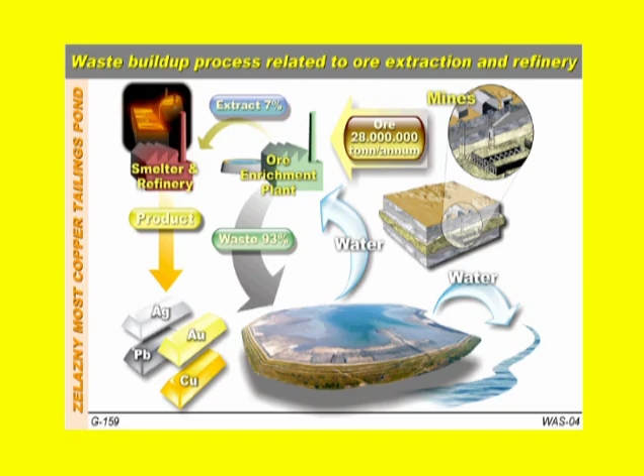But I am, unfortunately, not involved in that part of the problem - I am involved in the most dirty problem, which is the discharge of this waste into this huge tailing pond. In addition, the tailing pond discharges every year between 6 million and 20 million cubic meters of leachate from the pond into the Odra River, the second largest river in Poland. Because of environmental concern - but the plant cannot be stopped, as this is the largest industry in Poland in terms of yearly turnover - they pay tremendous fines to the government for discharging this leachate into the river.

This is the map of Poland. Poland is located here, and the tailing pond is in the southwest part of Poland, exactly at this point.

This is the plan view of the tailing pond. You have two main decant ponds and the secondary decant pond. This we will see later on.

The next work is, the client is this Polish cuprum industry, which is the government industry. The government holds the majority of the shares.

The International Board of Experts is made of Dr. David Carrier from the United States, Professor Richard Chandler from UK Imperial College, Professor Kaare Høeg from Oslo University and from the Norwegian Geotechnical Institute, and by myself.

We have as the interface, as the liaison officer with the client, the Polish geotechnical expert, Professor Wolski from Warsaw. When we were appointed by the client in '92, as I have mentioned, they asked us for an independent assessment of several issues.

The issues were: stability of the existing dam at crest elevation plus 150, feasibility of raising the dam crest to elevation 160 (we are now at 167), feasibility of further dam crest rising to plus 200, re-evaluation of construction procedure and monitoring system, and recommendation of additional soil investigation.

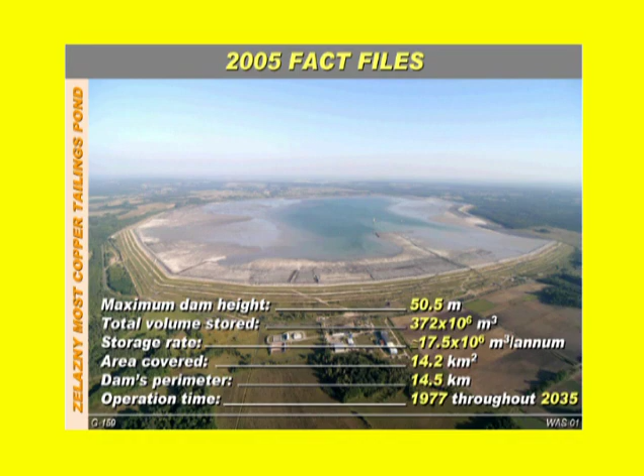The plant operation time is from 1977 to 2035.

It's clear that I shall probably not see, for sure, the final stage of this construction.

The tailing dam is constructed using the most dangerous method, the upstream method, as you can see here.

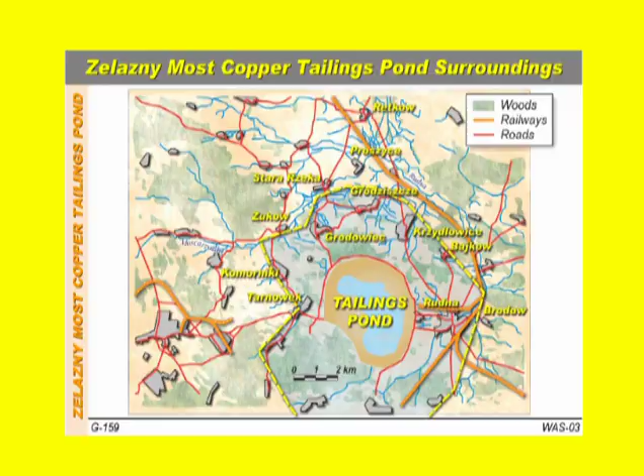Unfortunately for us, this tailing pond is surrounded by a number of small towns and villages, which obviously has created tremendous concern about public safety.

We can go on to the environmental impact caused during construction, which I shall not discuss in detail.

The impact on the tailing pond surroundings covers about 30 square kilometers, and the most important problems are contamination of surface and groundwater by infiltration of post-flotation leachate.

There is also dusting caused by wind on the beaches, the wind erosion, and this obviously requires continuous monitoring of groundwater, air, and terrain.

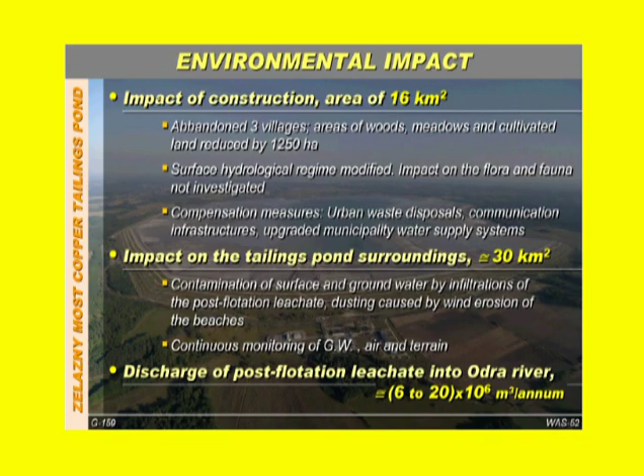As I mentioned, there is a discharge of post-flotation leachate into the Odra River, ranging from 6 to 20 million cubic meters per annum.

Next, geotechnical site characterization.

Site characterization, most recent investigation. The investigation focused on the foundation soil, assessment of index and mechanical properties, with special reference to Pliocene clay, which, as you will see, is critical for dam stability.

Localization, description, and quantification of periglacial and glaciotectonic phenomena in clays, which are fundamental.

This was done as the most recent investigation, ordered and planned by us after '92, around '95, '96. That is what we did as the most recent investigation.

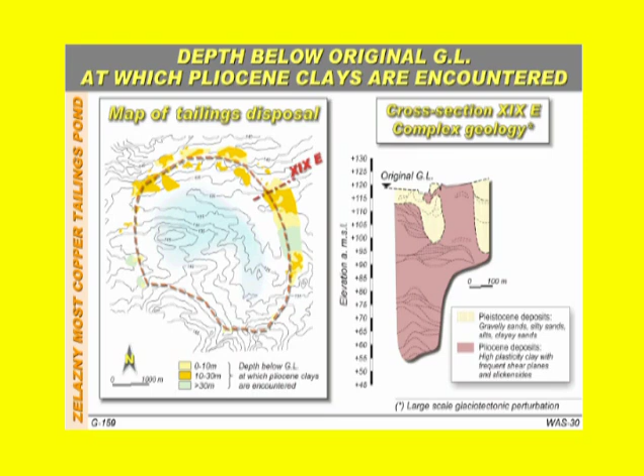Just to give you an idea, this is an example of a relatively simple soil profile here, which is one of the critical sections, 19 East. This is the Pliocene, this is the quaternary deposit.

Just to give you an idea, you will see something which is even much worse. Next, this is the critical cross section to which I shall refer, 16 East. This is the dam at the present elevation, 165 or 66.

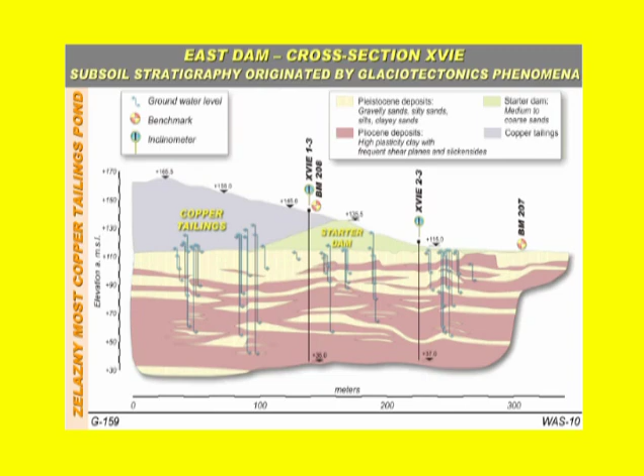This is the starter dam. This is the foundation. The red or light brown color is Pliocene, and light yellow color is Pleistocene. As you know, Pleistocene is much younger than the Pliocene. There are a few millions of years of difference, and you see what the glaciotectonics create in this very complex foundation.

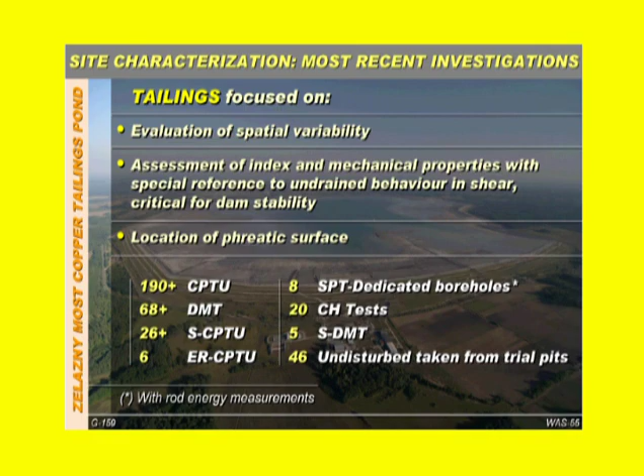Tailings. For tailings, we concentrate on the evaluation of spatial variability of tailings, assessment of index and mechanical properties with special reference to undrained behavior in shear, critical for dam stability, location of the phreatic line, and we did different in-situ testing, among which we have very recently performed 5 seismic dilatometer tests.

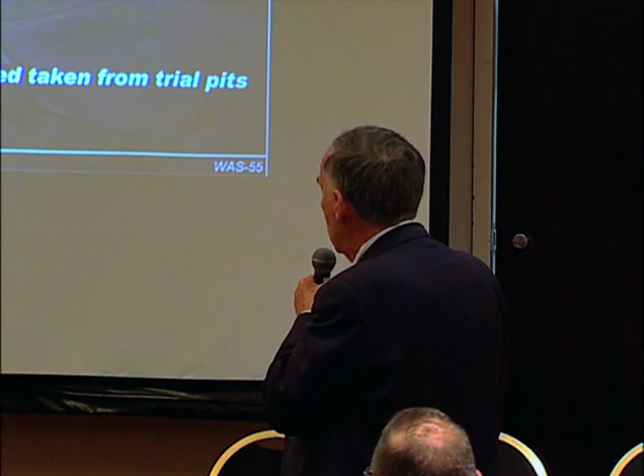We performed electrical resistivity CPTU, measuring both horizontal and vertical electrical resistivity, and we shall see some results of this test.

We have a lot of information, but there is a complete lack of a comprehensive database, and therefore to retrieve this information in real time from very chaotic documentation, mostly paper work, is becoming very difficult for us. We have been claiming for at least 5 years to give somebody the task to prepare a database which can be read in real time and accessed by the members of the international board.

This is the Casagrande plasticity chart, and we shall mostly concentrate on Pliocene clay because the quaternary deposits are sand and gravel, silty sand, which are not creating problems as far as the foundation is concerned.

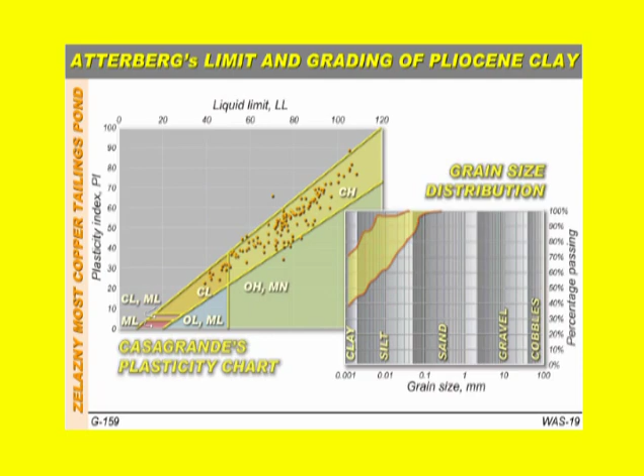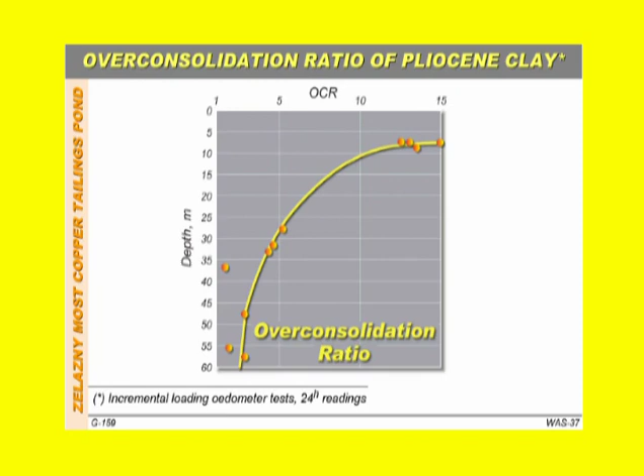Next, this is the over-consolidation ratio extended to 60 meters below the original ground level. Clearly, this clay is over-consolidated by mechanical over-consolidation, and the pre-consolidation pressure gives you an idea about the highest glaciers which were present at this place, which was the second glaciation in Poland.

Moreover, the problem of determination of the peak strength envelope here is also complicated by the presence of slickensides, which obviously lead to the need for very large tests for a given specimen in order to have some possibility to establish a reliable strength envelope.

These are the results of residual strength determination of this high plasticity clay. The test has been done at Imperial College of London using a ring shear apparatus. This is simply the tau shear stress over normal stress measured during two different ring shear tests, leading to this value of residual friction angle. Here you have the residual strength envelope from this test.

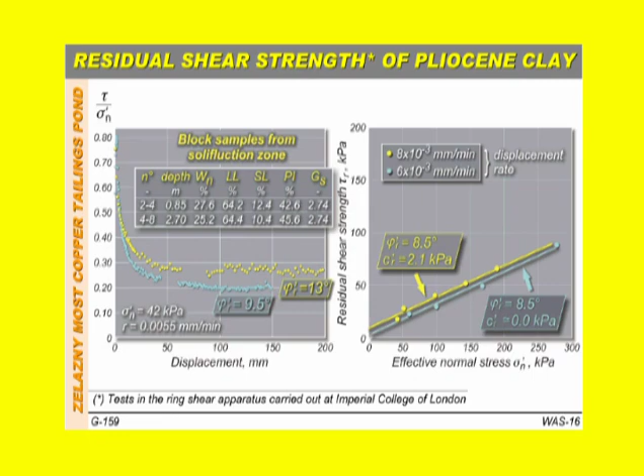Can you go back for just a while to the previous one? Okay, please note the extremely small rate of rotation which was necessary to assure the evaluation of drained residual strength, to avoid any complication due to pore pressure increase.

Here you have the same results. This is the residual friction angle at different normal effective stress, and what is also quite important, as is quite well known from previous investigation, for this high plasticity clay, the residual friction angle is decreasing as the normal stress is increasing.

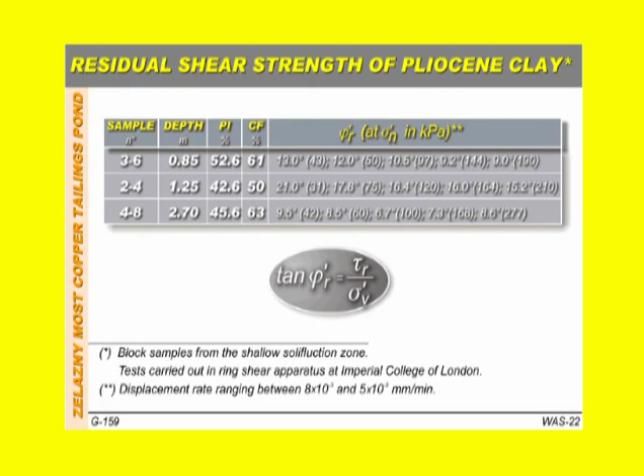The friction angle is given here, and the normal stress is given between the parentheses. This is also an important feature because we are continuously increasing the normal stress, raising the dam, and the residual friction angle is going down to some extent.

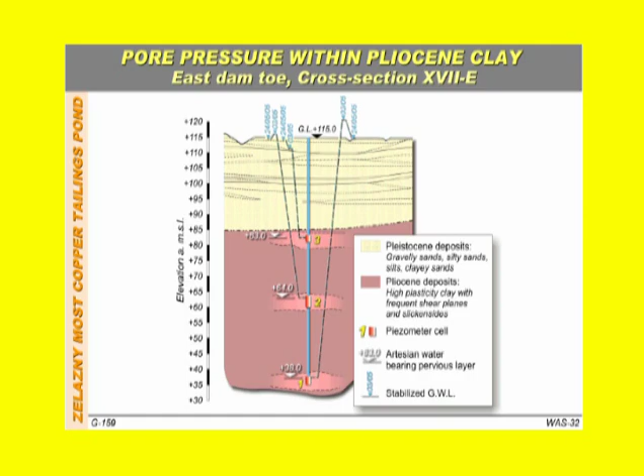The other very complicated feature of this foundation is that within deep Pliocene clay, we are finding slightly more pervious layers, mostly silt or slightly sandy silt, in which we are now finding piezometric pressure, which is either artesian or subartesian, very close to the surface, rising from this elevation from very large depths. This must be compared to the piezometric head in quaternary deposits, which was always below ground level, and therefore from the initial investigation performed before construction of the pond, never such high pore pressure has been found.

We discovered this relatively recently, about 3 years ago, and we have a non-easy task to explain this, and we are making the investigation. There are potentially 3 possible phenomena that might be involved. Seepage from the decant pond, but this should be immediately confirmed by the chemistry of the pore water, which is not the case. Construction excess pore pressure in sealed sand, silt, or brown coal lenses at large depth - so far no consolidation excess pore pressure has been recorded during construction of the dam. Or seepage from nearby higher ground - there is a lack of evidence that pore pressure prior to dam construction was truly artesian. We are investigating this because we are facing, for one or two dam sections, the danger, the threat of very deep shear failure.

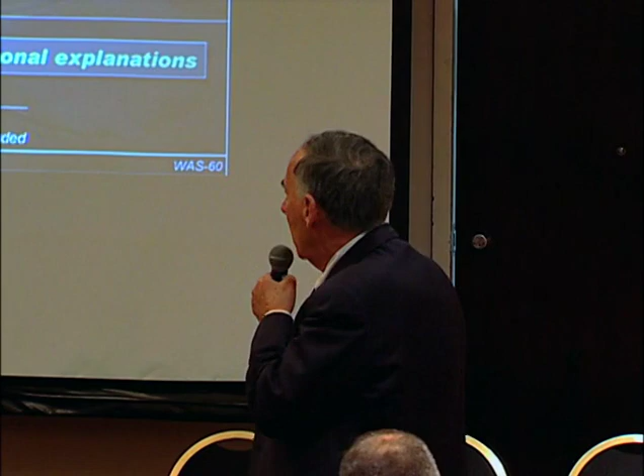Next, tailings. Here there are many surprises. This is the typical range of grading for tailings. Here you have the typical sand fraction, L means limo silt fraction, and clay fraction. Here you have the mineralogical composition, mostly quartz as you see. The specific gravity is ranging within these two values.

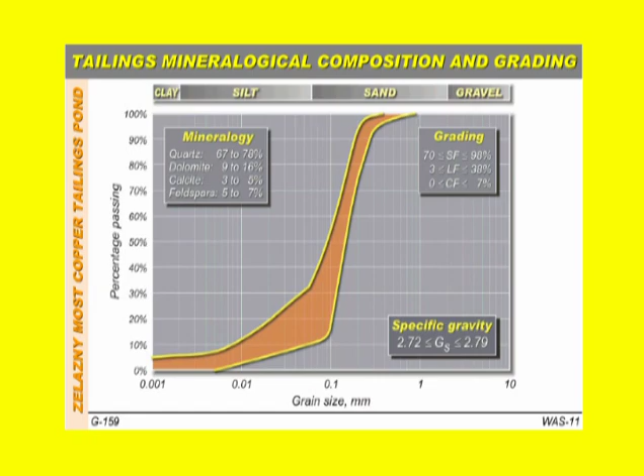I would like to mention, and you will see the example, that the phreatic line is the line corresponding to zero piezometric head and is not coincident in general with the saturation line. These two lines can be quite different and only occasionally coincide. You see that only at this depth can we speak about full saturation, because the compression waves are more or less constant around 1,600 meters per second - hence Professor Schmertmann likes feet per second, you must multiply this by 3.3, more or less. Otherwise here is completely unsaturated material. Here is unsaturated, but here you have probably a patchy water table in the tailings, which is giving you some kind of saturation peak here. Very complicated situation. Obviously, the evaluation of porosity of tailings was done only starting from this point, from the point of full saturation.

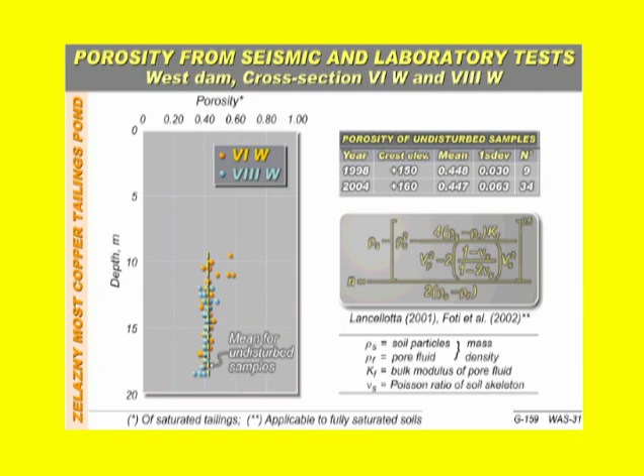Here you see the porosity evaluation. This is the porosity, the different dots are the porosity from two crossholes. One of these was certified by Dr. Foti, therefore you can believe in this data - where is Dr. Foti? It's here. The other was done by me after the certification by Dr. Foti - you remember you sent me the email just before leaving for the United States. And this line is the mean porosity for undisturbed samples, which are block samples retrieved from the tailings. Even if we don't have the absolute correspondence between the location of the sampling and the location of the crosshole, this is very good confirmation of what Dr. Foti showed us this afternoon.

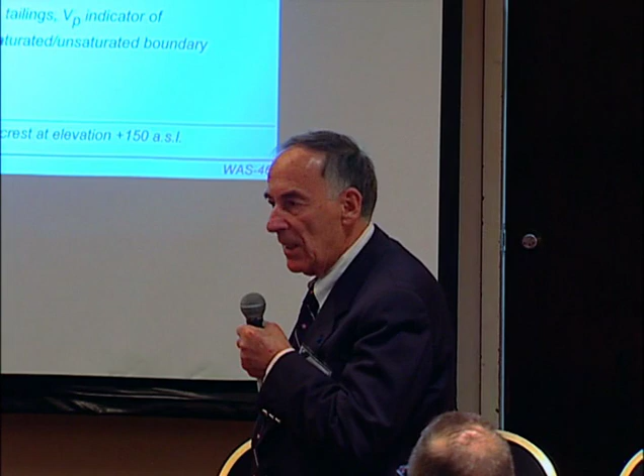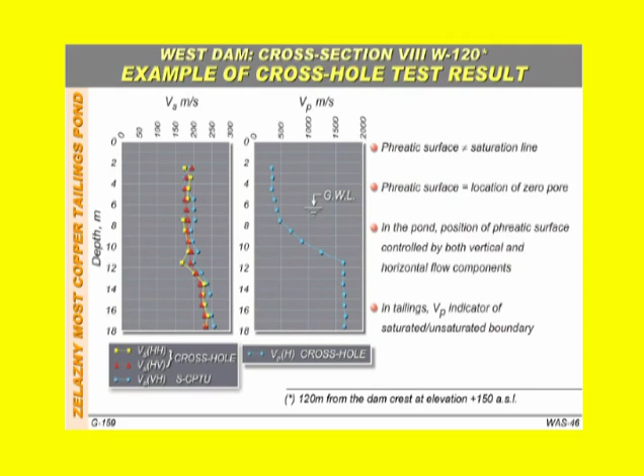Here you have an example that the piezometric surface or phreatic surface is not coincident with full saturation. In this case, this is the shear wave velocity measured in 3 different cross holes. Here also we have measured the horizontally polarized and vertically polarized shear wave velocity in the crosshole using the crosshole method, and I can assure you that in this case also the evaluation of porosity taking these 2 shear waves leads to very similar results as I have shown you for Chioggia, which is near Venice, just for understanding. Here you have the compression wave velocity, an example. You see saturation clearly started here, but the piezometric level read in the 3 or 4 adjacent piezometers gives you this level. There are many cases where the piezometric level is higher than the saturation line. There are also cases where the saturation line is higher than the piezometric level, especially if you are facing the problem of important capillary rise. I cannot develop this problem to a larger extent, but this is a quite important problem for liquefaction and for many other situations.

Next, now we are going to this recent baby of Silvano. This one you have seen. Next.

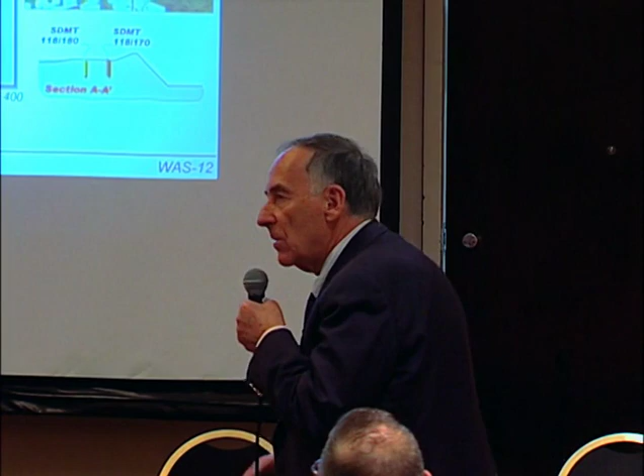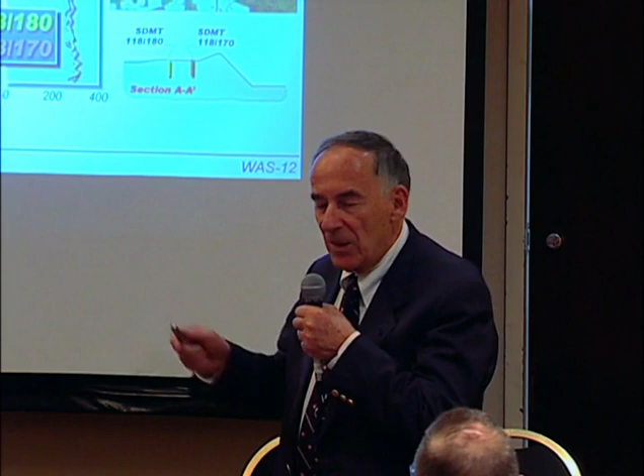These are 2 seismic dilatometer tests carried out close to the dam crest, and about 20 meters from the dam crest. You must understand that in tailings, because of the method of disposal, close to the dam crest you deposit more coarse material, sand. As you go farther from the dam crest, the material becomes finer and finer. Even though here the distance is relatively small, the red line corresponds to the seismic dilatometer closer to the dam crest, the yellow farther from it. Without going into details, the constraint modulus is higher closer to the dam crest, clearly picking up the more sandy nature of the material, and this can also be seen in the shear wave velocity.

These tests were extremely successful. We ran 5 of these tests very recently at Żelazny Most, and the tests have been mentioned already before. I had a small discussion with the boss, Silvano. I took 5 locations at which the seismic dilatometer had been performed. 3 of these locations I was, and still am, directly involved with professionally. The other 2 results were given to me by Silvano, and I took the worst location of the shear wave velocity measurement.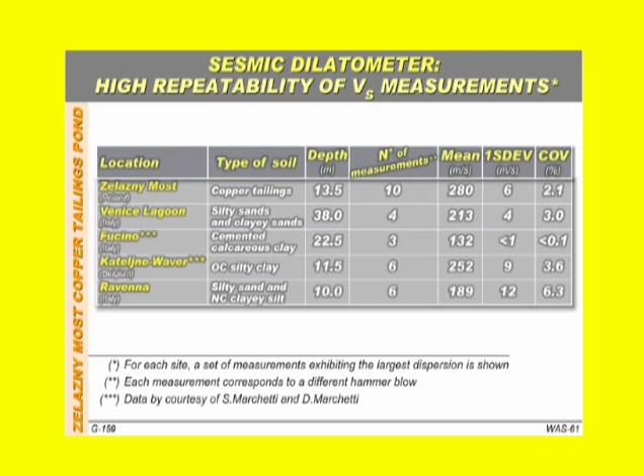I must say, if you take the book by Professor Harr on the variation of soil properties for different parameters and different soils, you will never find a variation or standard deviation less than 20-25%. So if you are speaking in geotechnical engineering about a coefficient of variation of 6.3%, this is really nothing.

But this is the worst example, and I know from Diego - he told me during dinner, he was eating, but I was not, as you know, in order to keep you awake - that this was partially due to noise, because these tests were performed very close to a very large electrical gas or oil-fired power plant, and this was causing the noise. Am I right, Diego? Okay. So there is really unbelievable repeatability in this test.

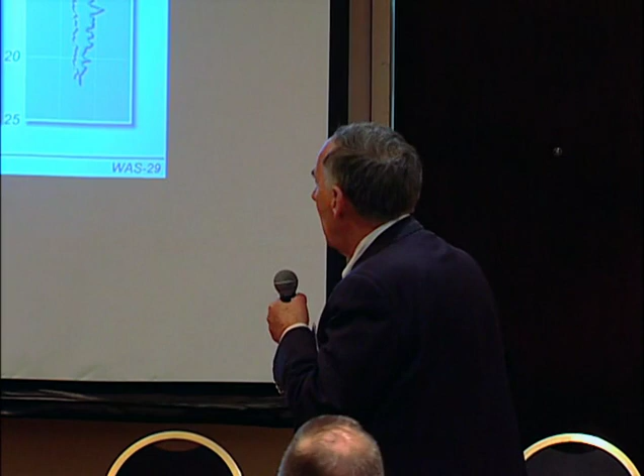We also measured electrical resistivity using the electrical resistivity cone, allowing us to measure both horizontal and vertical electrical resistivity around the cone. The purpose of this test was twofold. First, to have an independent evaluation of the porosity. The other was that from interpretation of the electrical resistivity, you can obtain information about intrinsic or structural anisotropy, as opposed to stress-induced anisotropy - which was the subject of Dr. Foti's presentation, where he spoke about anisotropy including two components: structural anisotropy and stress-induced or mechanical anisotropy. Hence we also have horizontal and vertically polarized waves.

We are very interested, and still are, in working out something about the anisotropy of tailings. The horizontal and vertical electrical resistivity, in ohm-meters, are shown here. We made the interpretation only starting from the point where the tailings begin at the piezometric level, because to make a rational interpretation of this electrical resistivity, we need the electrical resistivity of the pore fluid, which is already a complicating factor. This resistivity of pore fluid is not constant with depth, not constant in space, and can only be measured once you enter the saturated material.

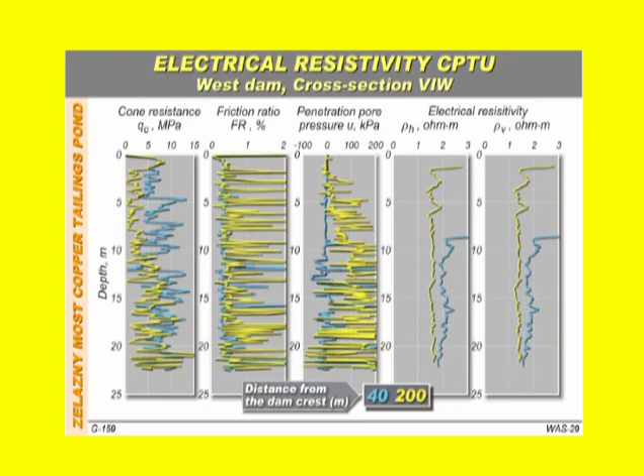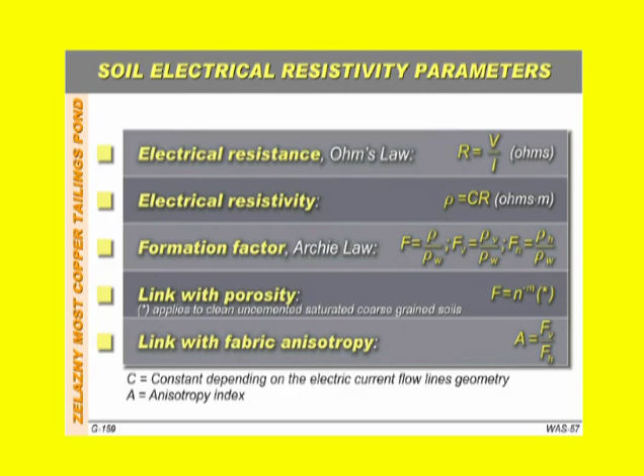This is what we used to interpret the electrical resistivity. We are mostly interested in deriving the porosity, and in obtaining information about intrinsic, structural, or fabric anisotropy, which is the ratio of formation factors. The formation factor is the measured electrical resistivity divided by the corresponding resistivity of the pore fluid. Since the resistivity of the pore fluid is not constant with depth, this makes the interpretation a bit cumbersome.

The next tragedy for people who must perform the design calculation is the variation of the piezometric head in the tailings.

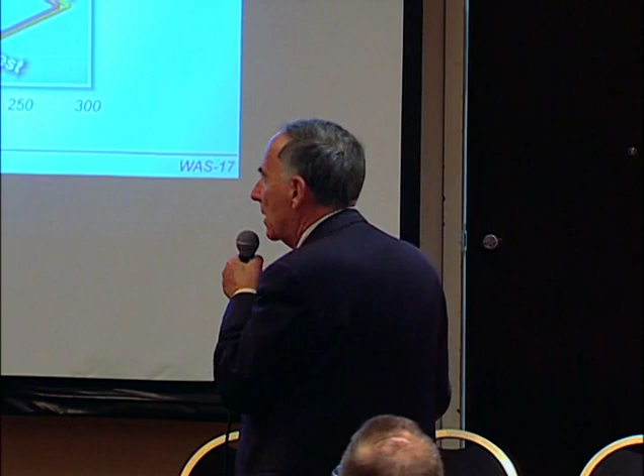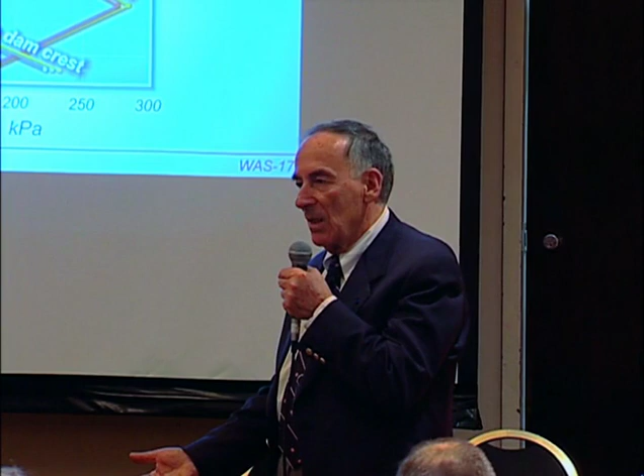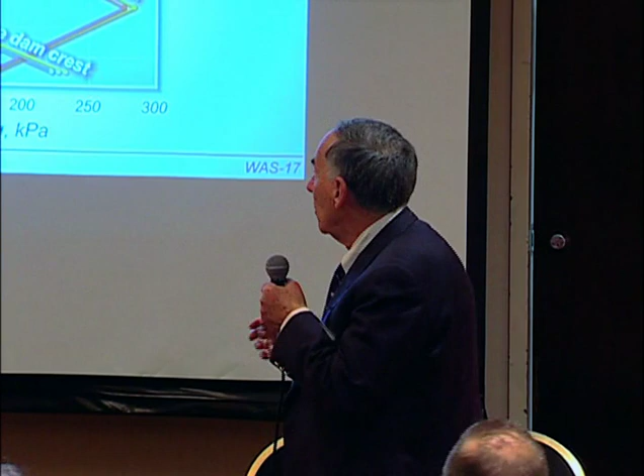The piezometric head in the tailings is extremely variable. It depends from day to day on where you discharge the slurry, and on how pervious the original foundation soil is, because if the soil is pervious there is a downward flow. Close to the dam there is horizontal flow toward the drain. This is a continuous concern when you need to perform the stability analysis.

This is just to give you an example: this is the piezometric head in the tailings and in the foundation at 100 meters from the dam crest and at 300 meters from the dam crest. This is, from the design point of view, a very serious and very difficult problem to solve.

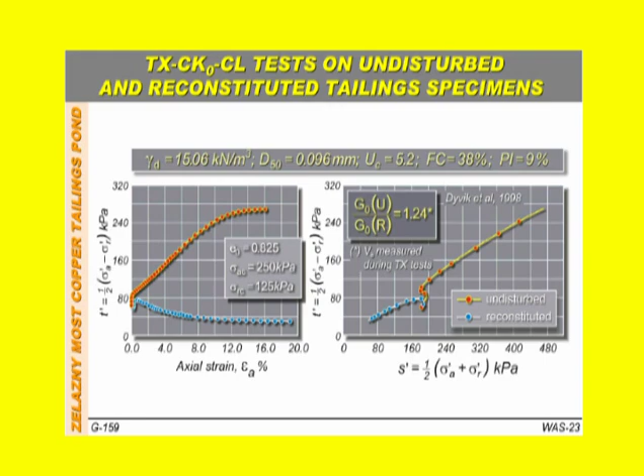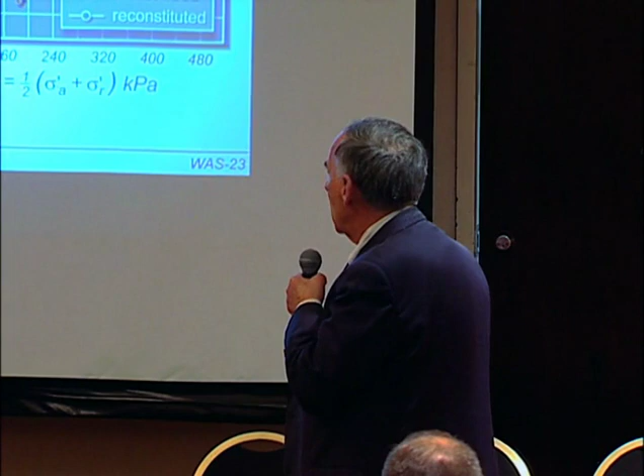To be clear, we first ran the undisturbed test, and thereafter we used the same material and reconstituted the specimen with the same void ratio, subjecting it to the same consolidation stress and running the same triaxial test. This was a very important surprise.

There is also clear indication that G-zero in the undisturbed state, measured using bender elements, is higher than G-zero in the reconstituted state, confirming that the undisturbed tailings have either a special structure or very thin bonding due to precipitation of salts in the pore fluid. We don't know exactly, but they have completely different behavior.

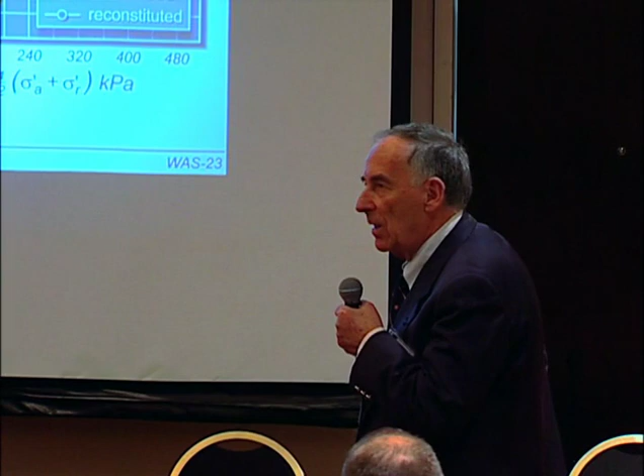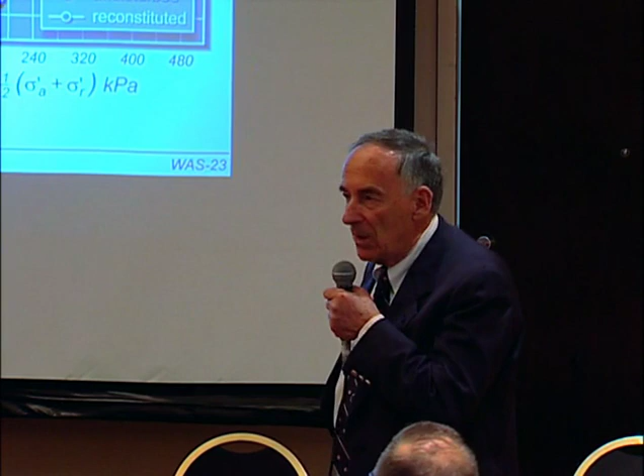I must mention that before running this test, we ran about 150 triaxial tests on reconstituted tailings, spending tremendous amounts of money and arriving at tremendous concern about static liquefaction. Once we decided to go to much more complicated undisturbed sampling, this problem practically disappeared, or in any case was largely reduced.

Because this was so unexpected and so strange, in 2004 we decided to repeat this exercise, taking again a large number of undisturbed samples. This time the test was done in Poland, whereas the previous tests had been done at NGI.

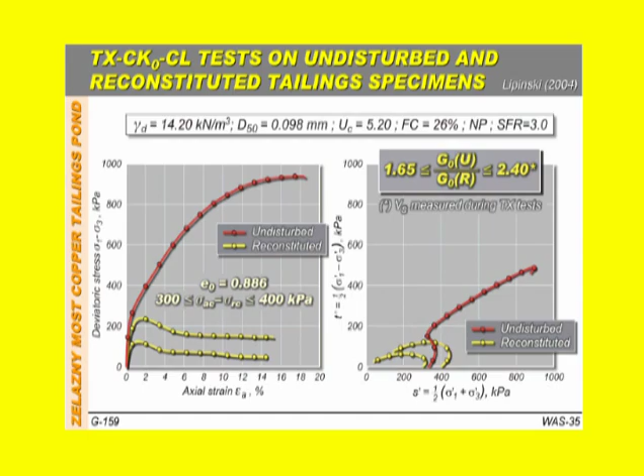Again you see the undisturbed samples, the red stress-strain curve and red stress path, exhibiting exactly the same behavior: phase transformation, dilatancy, while the reconstituted specimen again shows liquefaction. In this case, even the ratio of G-naught undisturbed over G-naught reconstituted was even higher, between 1.65 and 2.40. This was very good news, and it clearly reduced our concern about static liquefaction to a very large extent.

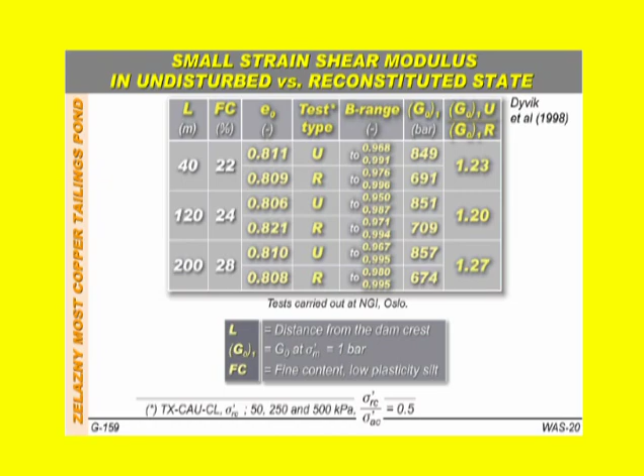Next, there are some detailed results of the bender element tests on reconstituted and undisturbed samples. This is most important: the 1998 test.

What did we learn from the site characterization? We learned many things. The most important are here.

Tailings in undisturbed state exhibit dilative behavior during shearing. High plasticity Pliocene clay was subject during the Pleistocene to intensive periglacial phenomena, suggesting the presence of shear planes and slickensides extending to great depth. We found slickensides at a depth of around 80 meters below ground level.

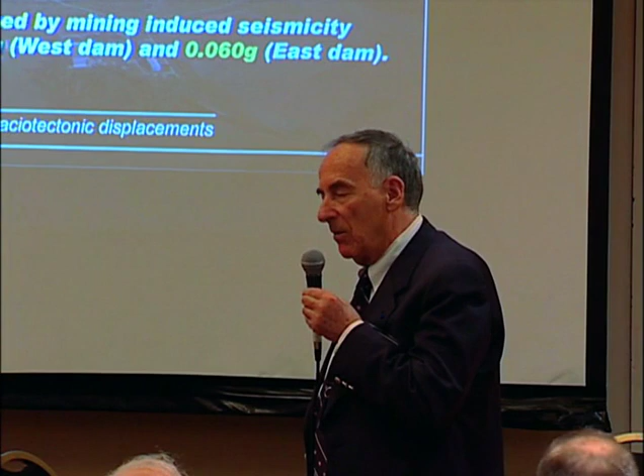Pore pressure within tailings exhibits large spatial variability, and generally the distribution is not hydrostatic. Another problem: the mine is very close to the tailings pond. Although this is an aseismic region, the mine activity induces what is called mine-induced seismicity, which is also of concern for this kind of structure.

The horizontal peak ground acceleration caused by mine-induced seismicity varies between 0.092 G and 0.06 G. Generally, as you are closer to the mine, at the west dam, the peak ground acceleration is higher. As you move farther from the mining zone, the peak ground acceleration decreases.

Selected geotechnical problems, next. As I mentioned, when we started this work, we envisaged the stability problems of these types: tailings flow failure alone, as above triggered by foundation soil failure, and shear failure within the Pliocene clay. Now we are mostly concerned about the third type of instability.

Here you have the possible behavior of tailings in terms of shear stress versus shear strain. Fortunately, we are in case 1. Here you have the well-known behavior of high plasticity clay, with peak and residual strength, and we are now dealing with this serious problem of foundation instability. Next.

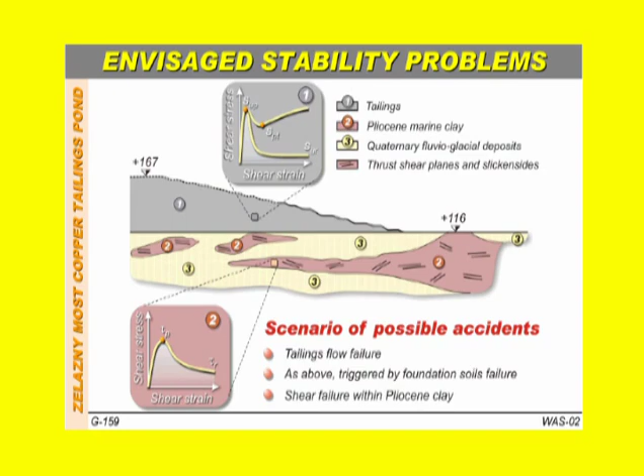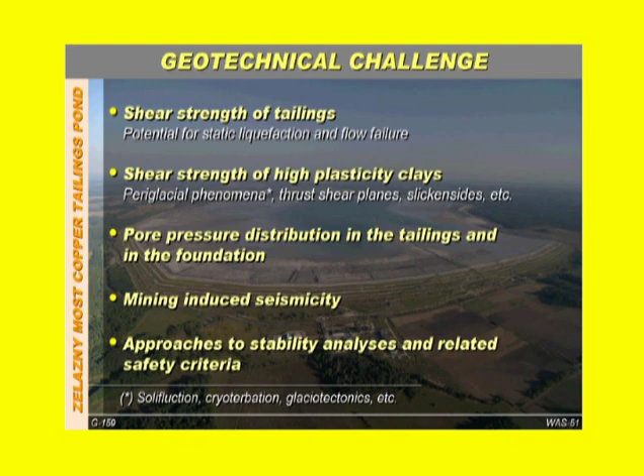What are the geotechnical challenges? Obviously, as we said: shear strength of tailings, potential for liquefaction, shear strength of high plasticity clay, periglacial phenomena, pore pressure in the foundation, mining-induced seismicity, approaches to stability analysis, and related safety criteria. We shall mention this later on. Next.

The problems. This is the most scary problem to me, in section 16E, which is the one having the Pliocene clay very close to the surface. Since 1977, we have observed displacement, both vertical settlement and horizontal displacement. The upper diagram shows horizontal displacement in millimeters against time in years.

The green line represents the benchmark on the starter dam, and the red line represents the benchmark on the original ground surface close to the toe of the dam. As you see, until 7 or 8 years ago there was no concern, but in this period the dam has been raised to a large extent, and in the last 6 or 7 years we started to monitor large and increasing horizontal displacement of this benchmark, and to some extent of this other one.

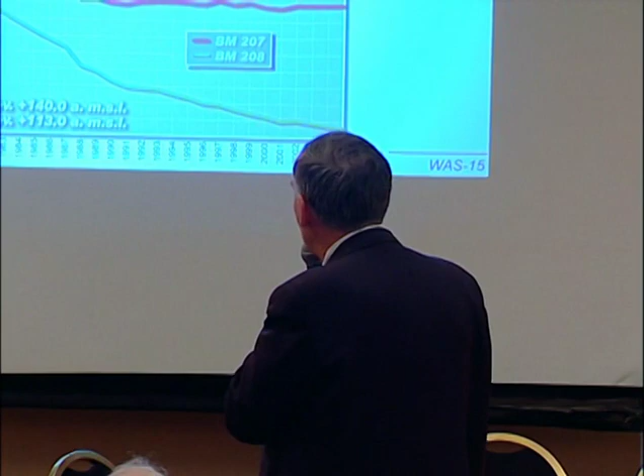At some point we installed very deep inclinometers. We had shallow inclinometers which were not showing anything special. We installed very deep inclinometers, next, and this is unfortunately what we discovered.

We installed the inclinometers, one at the crest of the starter dam and one at the toe of the dam. These inclinometers were successfully installed only in January 2004, and you see what we discovered.

This is the elevation above mean sea level, since the inclinometers are placed at different elevations. We discovered that in both inclinometers there is a very clearly evidenced shear plane at an elevation of about 40 meters above mean sea level. Remember, the dam is now at 165 meters above mean sea level, and the original ground elevation is around plus 115 meters above sea level. This result is very repeatable from this point to this point, and these are probably local perturbations, but we are obviously concerned about this and about this displacement.

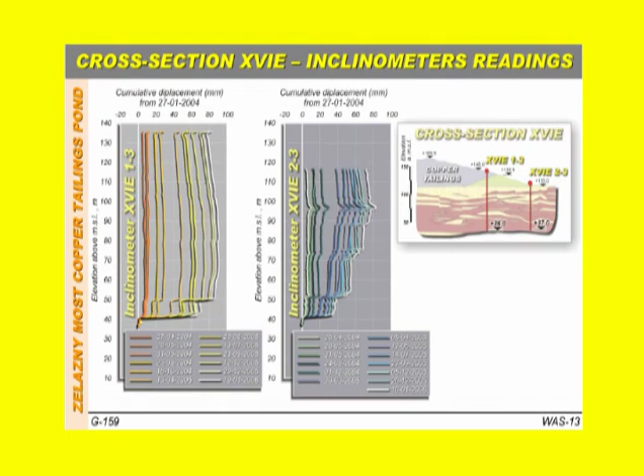We have a very important meeting in June, because we must certainly adopt some remedial measures. This concerns only the section of the dam where the Pliocene clay is just beneath the dam or very close to it. Where the Pliocene clay is at large depth, nothing happened. Professor Schmertmann told me before the lecture that with such a long dam, there must be some section with high probability of failure. This is that section, unfortunately.

Next, we have the problem of stability analysis, where we must compute at least the phreatic line. We are very conservative regarding the phreatic line, and with very few exceptions we make the calculation assuming that the piezometric head increases linearly with depth, in order to numerically evaluate, using finite element calculation, the phreatic line in different sections.

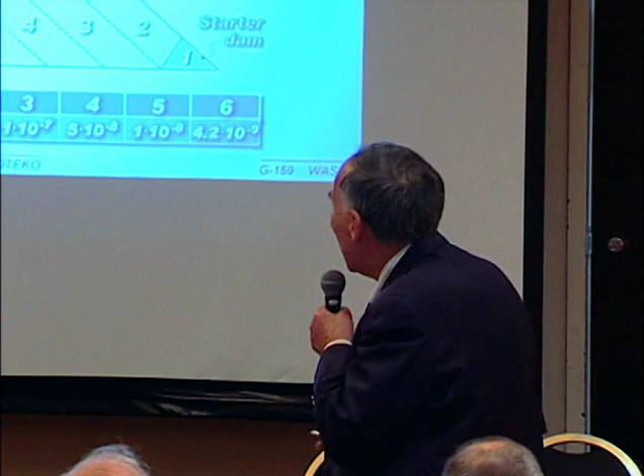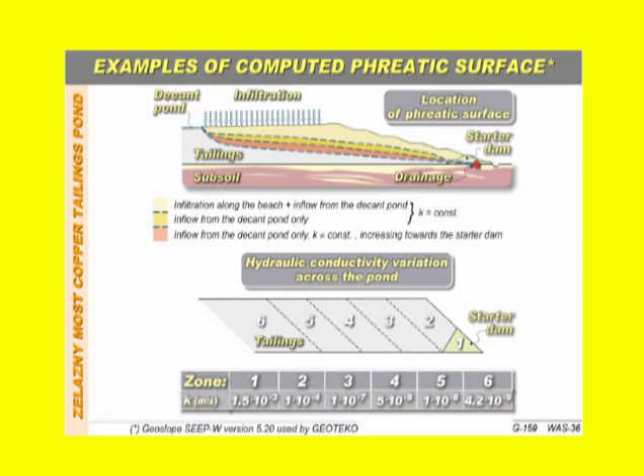We made some assumptions about how the coefficient of permeability changes from the starter dam: 1.5 times 10 to minus 3 meters per second. As you go from the starter dam toward the decant pond, the soil becomes finer, and at the decant pond we have soil which is 4.2 times 10 to minus 9 meters per second. Therefore, permeability decreases in this direction.

Here is what we obtained as the phreatic line for different cross-sections for the design. Next, the design parameters.

We have adopted, after 4 or 5 years of intensive soil investigation, the following design parameters for the stability analysis. First, the shear strength of Pliocene clay, which is the real problem. We have a zone of specially disturbed solifluction, a cryoturbated zone, and finally tertiary clay, which is slickensided and contains a lot of shear planes. These are the design parameters adopted for Pliocene clay.

For quaternary deposits, as you can see, with this shear strength there is no problem with stability. For the tailings, despite this experience with undisturbed samples, we stay very conservative.

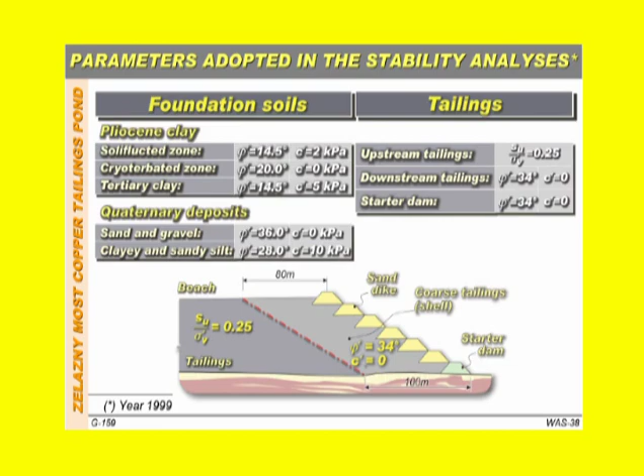For upstream tailings, we have SU over sigma prime V equal to 0.25, which is much lower than the same value at phase transformation. This part of tailing is fully drained due to different toe drains and so on. For tailings, we have phi prime 34 degrees and C prime obviously 0. This is very close to the friction angle at critical state.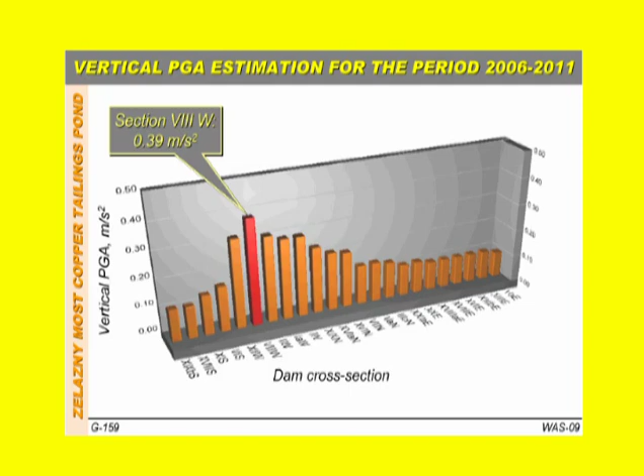Next, as it should be, the vertical peak ground acceleration is much lower. I have no time to explain why, but this is the rule, and again this shows the same trend going along the perimeter of the dam.

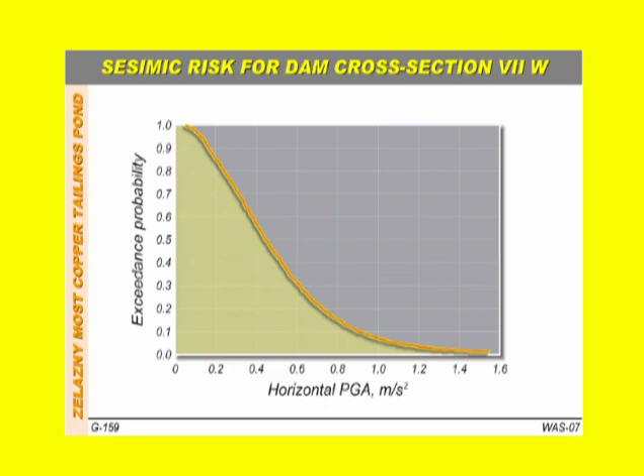This is for horizontal peak ground acceleration, showing probability of exceedance. We take a probability of exceedance of 5%, which corresponds, with no direct comparison for earthquake-induced seismicity, to a return period of about 450 to 470 years. Mentioning the return period has no real meaning except that we are using a similar exceedance probability.

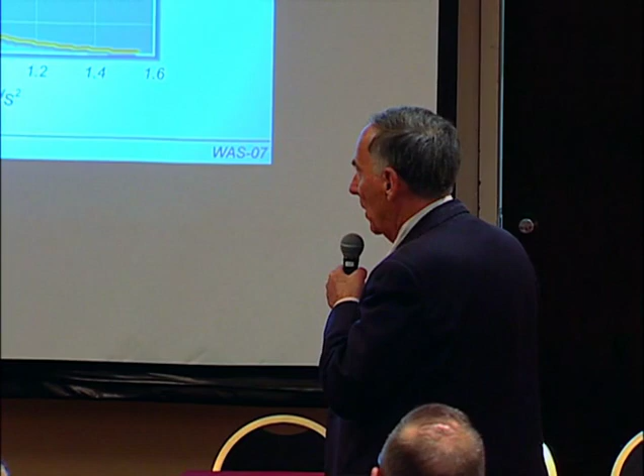Next, stability analysis. This is currently done using Fredlund's global limit equilibrium method and a similar Morgenstern-Price method. There is potential for an extensive portion of non-planar failure surface requiring non-circular analysis, mostly due to these glaciotectonic phenomena.

We are making, except in some specific cases, a conservative assumption of hydrostatic pore pressure distribution below the phreatic surface, as long as this conservative assumption complies with the required pore pressure safety margin. If not, more detailed pore pressure analyses are required.

The required safety factors for failure involving a large volume of tailings, not considering mining-induced seismicity, must be 1.3 at least. When considering mining-induced seismicity according to Polish regulation, even using an extremely conservative pseudostatic approach, we must stay above 1.15. This is causing us some problems.

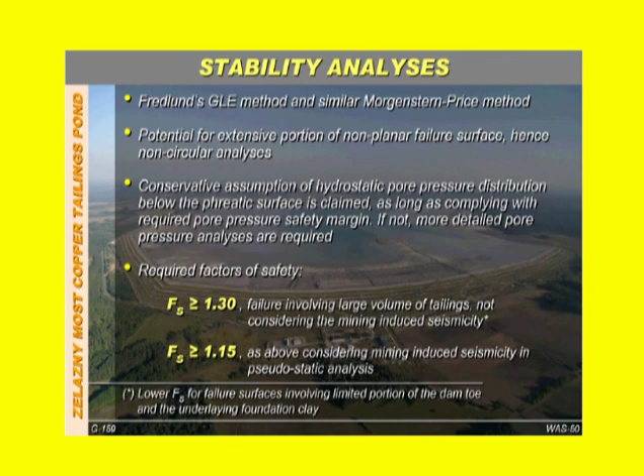Next, this is one example of a non-circular sliding surface at a critical dam cross section. We have a safety factor of 1.27 with the horizontal coefficient of acceleration equal to 0.04, which is too high if related to the distribution of peak ground acceleration around the perimeter. This analysis was done before we obtained this data concerning mining-induced seismicity.

Next, here you have an example of a different cross-section with and without mining-induced seismicity. When we go below, this is unfortunately the East Dam, the one which is moving, showing too low a safety factor with the induced seismicity.

We are going to examine the local piezometers and local groundwater conditions, which unfortunately change with time, because the tailing pond is a very strange geotechnical structure in which the boundary and initial conditions are continuously changing with time. Taking appropriately the piezometric head, we obtain, instead of 1.08, a value of 1.21.

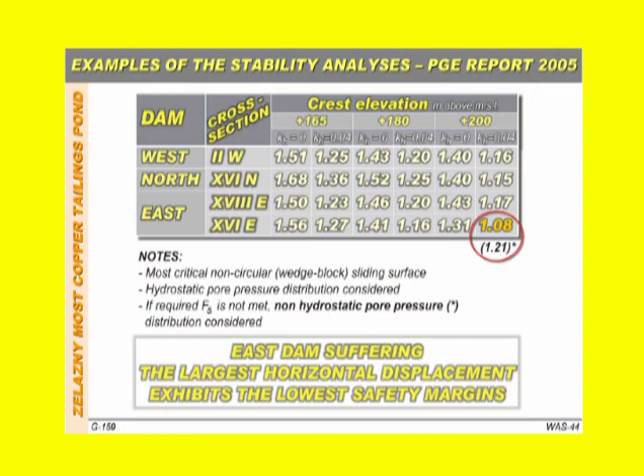All these stability analyses do not consider the very deep sliding or displacement surface which we have discovered recently. When making the calculation of stability for this deep sliding surface with the design parameters, you end up with lower safety factors. We don't know exactly in what kind of soil this sliding is occurring, nor the role of the brown coal which we find in lenses at the same elevation, and this is the problem we shall try to solve in the near future.

Next, closing remarks.

As I have mentioned, the challenge is extremely complex geology and groundwater condition. Boundary and initial conditions are changing continuously. There is a serious environmental hazard which I did not deal with, and this is mining-induced seismicity.

As I have mentioned, we have considered different accident scenarios, and however, owing to this test on undisturbed samples, the hazard of liquefaction has been largely attenuated.

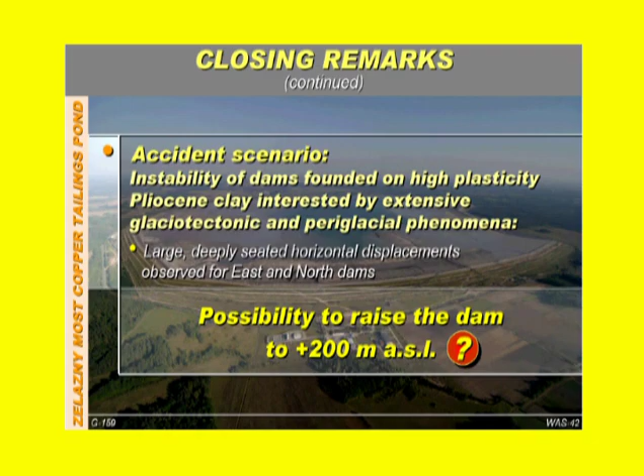In this situation, we clearly must raise the question to the client that it might not be feasible to raise the dam to elevation of 200 meters. It can be for some section of the dam where the Pliocene clay is close to the surface, it can be some kind of threshold shear stress, beyond which the shear strength of this highly tectonized, high plasticity clay is not able to withstand.

One fortune is that in this clay, because we are very close to residual as the operational strength, the behavior is very ductile. Nothing can happen leading to very large displacement of the dam. And this, to some extent, is probably our fortune.

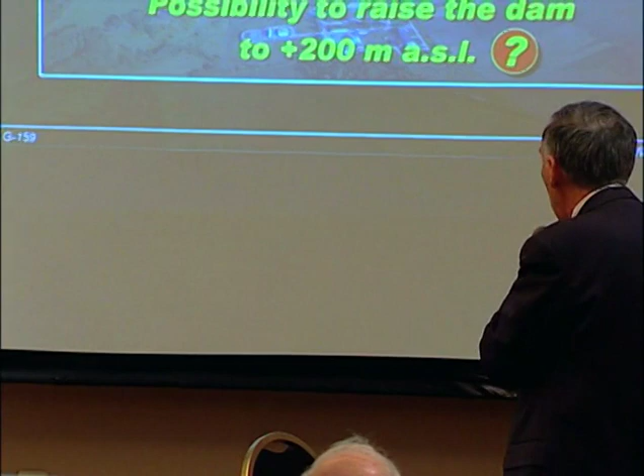Obviously, we are thinking about the remedial measures, which we have already adopted partially. We are thinking about stabilizing berms, but don't forget that the stabilizing berms are of limited efficiency because of the very low residual strength and very low strength of the soil, and therefore even increasing to a large extent the vertical or normal stress on the sliding surface, which is horizontal or subhorizontal, the benefit is not very large.

Now we are making some tests with very deep dewatering relief wells to relieve this high pore pressure which we found on these two sections which are subject to large displacement. This looks like something which can be very efficient, and it will not cause tremendous problems to the mine because around the tailing pond we already have the relief wells which are pumping the leachate drain from around the dam, so pumping out the water will not aggravate the cost of running the tailings pond.

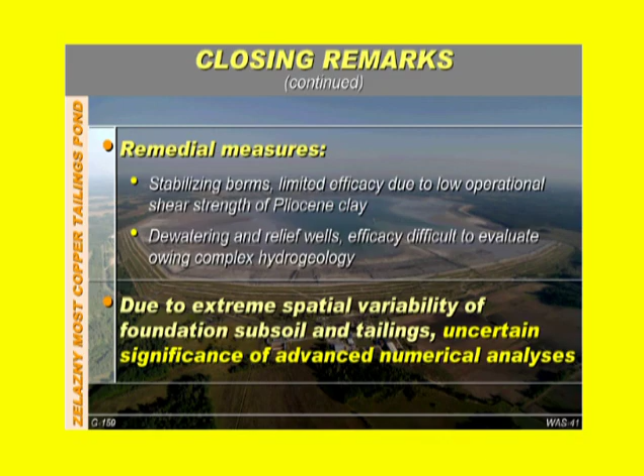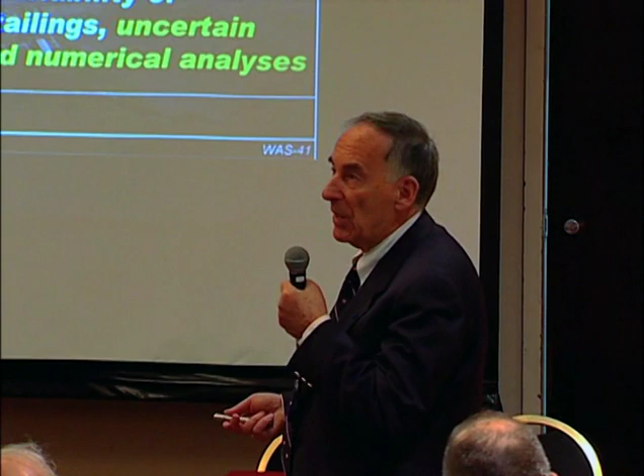What is important, we try, and we shall try in the future, some advanced numerical analysis, but with this spatial variability, especially of foundation, but to some extent also of tailings, significance of any advanced numerical analysis is very questionable. You cannot reproduce the spatial variability of foundation soil which you have seen. Or if you will try, as we did, you must simplify to a very large extent.

There are also some remedial measures on environmental impacts which I am not going to discuss here. Everybody who wants a copy of this presentation must ask Roger. I leave him free to release this presentation to everybody.

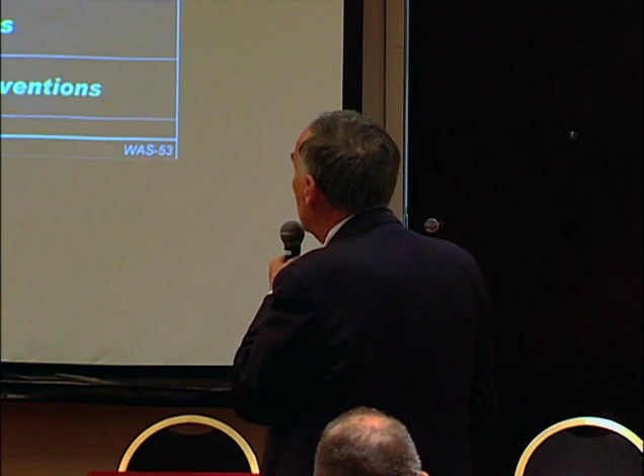I must acknowledge the management of Żelazny Most copper mine for consenting to let me present this lecture. I must express my special thanks to the friends and colleagues from the International Board of Experts, Dr. Carrier, Professor Chandler, Professor Høeg, for their high scientific expertise, dedication and competence, to Professor Wolski, Dr. Lipinski, Dr. Sorbian from Geoteko, and to Professor Młynarek and Tschuschke. He's from Poznań University and he's running a company, Hebo, for providing the experimental data contents of this lecture.

Finally, I must acknowledge the many geotechnical consultants and many companies involved in this very huge work, which you can see here. They are mostly from Poland, but there is also ISMES from Bergamo, there is Imperial College from London, the Norwegian Geotechnical Institute, and there are many people who contribute and are contributing to this challenging work. Thank you for your attention.

Question? Please come to the microphone, because otherwise I must repeat your question to the audience.

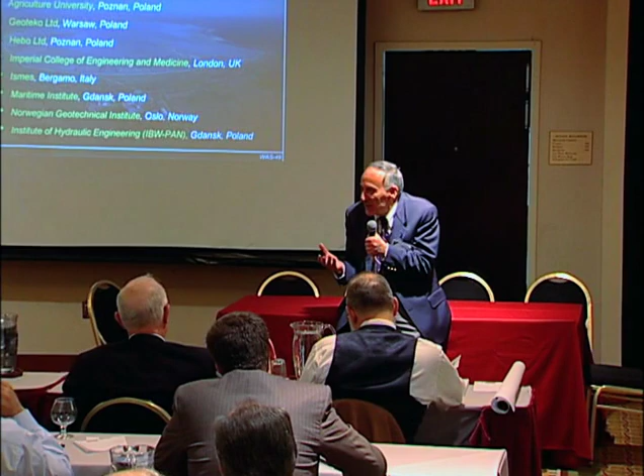First of all, I must say that the undisturbed samples which we have retrieved from the pits excavated in the beach are not more than 5-6 years old, because we were not able to go deep. Therefore I am not sure if the real aging is, at least for these samples, playing an important role. I believe the difference between undisturbed and reconstituted specimens is mostly due to the structure. They are very elongated particles, and probably they form a very complicated structure which we don't know. I also expect that because the pore fluid is the leachate, containing a lot of different minerals dissolved in it, there can be some precipitation and some very teeny bonding at contacts between these very angular grains.

On the other hand, we have some indication from the shear wave velocity and from some general information that tailings, indeed deeper tailings, are subject to aging. In fact, our next step will be to retrieve undisturbed samples and investigate in Ko-consolidated specimens, in a large 4-inch diameter triaxial cell, the aging for a long duration test. I am not able to say precisely, but I expect it will be quite important aging, certainly much higher than we expect for clean quartz sand, which still is not negligible according to the Mesri data.